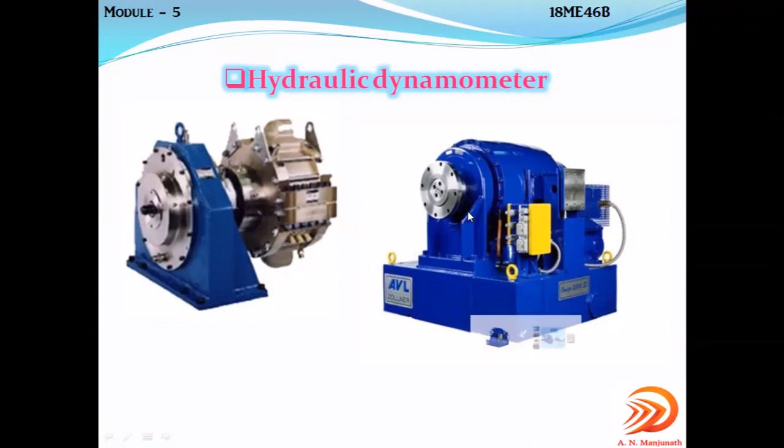Right. So these are some of the dynamometers which may be used in the industries. Hydraulic dynamometer. See, this is the image which is given in the book. Hydraulic dynamometer. You can observe the image. It consists of water here, right? Hydraulic.

So this will be the housing. This is the shaft, which is coupled to the device or the machine for which you are supposed to do the measurement of the torque or the power, right? That is the shaft which is to be connected. This shaft is placed on the trunnion bearings. You can observe here, right? This arrow mark indicates it is rotating.

Inside this housing, there will be radial blades. I will show the video so that you can get the idea of how the blades look and how the movement takes place. So there is an inlet water and an outlet water, as shown in the image. Water inlet, water outlet. So water will flow around these radial blades.

Right. So this is what the housing looks like. And this housing is connected with a reaction arm. This reaction arm is the one which will measure the force, the torque produced by the machine or the engine to which this dynamometer is coupled. So, hydraulic dynamometer.

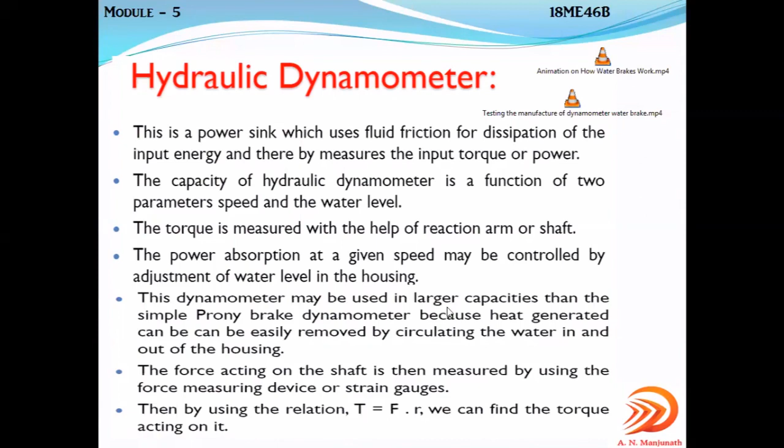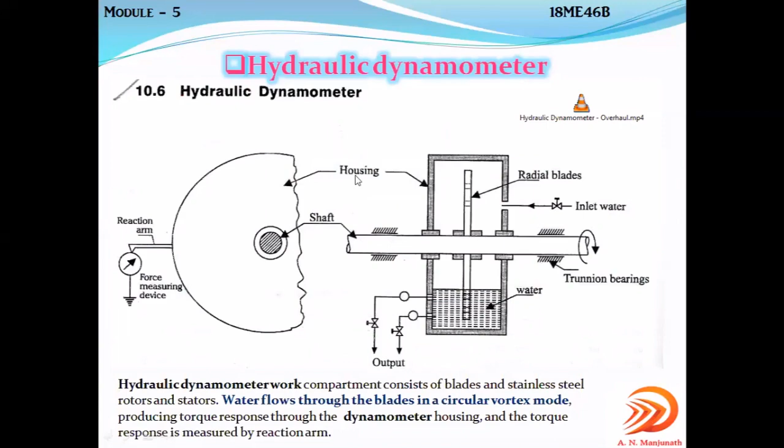So we'll just play a video about the parts so that you can have a little better idea about what a hydraulic dynamometer actually is, and how the radial blades, the impellers inside this housing, will look.

So it is a power sink. It works basically on the principle of fluid friction. So these can be built for considerably larger capacity as compared to the Prony brake dynamometer, which is a mechanical dynamometer.

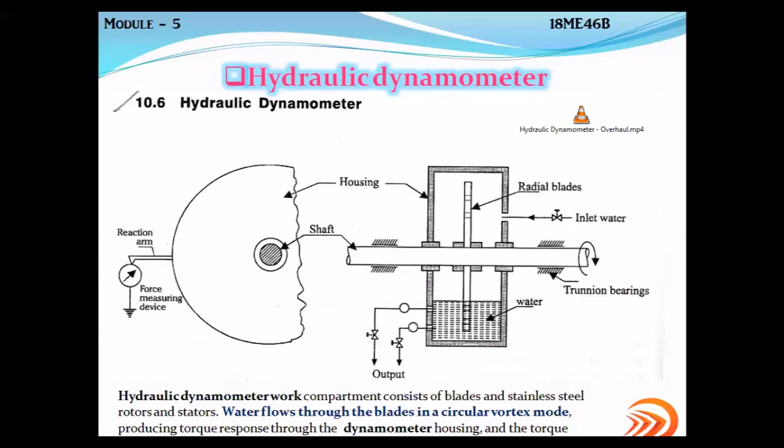This is a hydraulic dynamometer. So, some of the advantages of hydraulic dynamometers over mechanical brakes. Mechanical brake means the Prony brake, right? As compared to this, what advantages is the hydraulic dynamometer going to have over mechanical brakes? In the hydraulic dynamometer, a constant supply of water running through the braking medium acts as the coolant.

So as I told, these hydraulic dynamometers may be made in considerably larger capacities compared to the mechanical brake, the Prony brake dynamometer, because the heat it is going to...

Advantages of hydraulic dynamometers over mechanical brakes: these are flexible in controlling. These can be used to measure the brake power of very large and high speed engines. This uses the water itself as a coolant, as compared to the Prony brake. The Prony brake or mechanical dynamometer is a dry friction dynamometer, whereas this one is fluid friction.

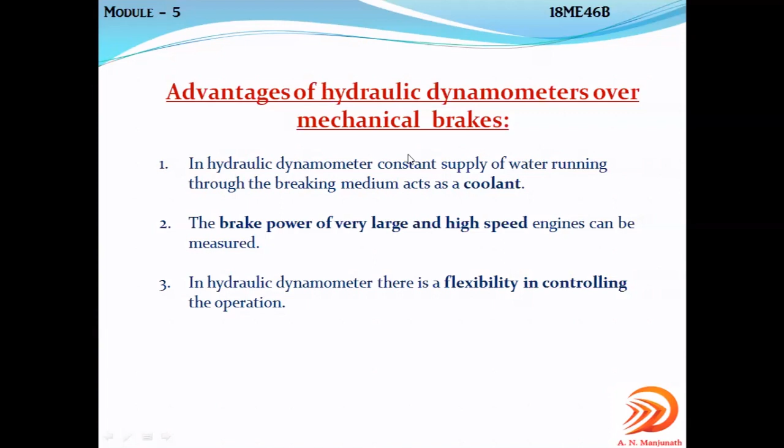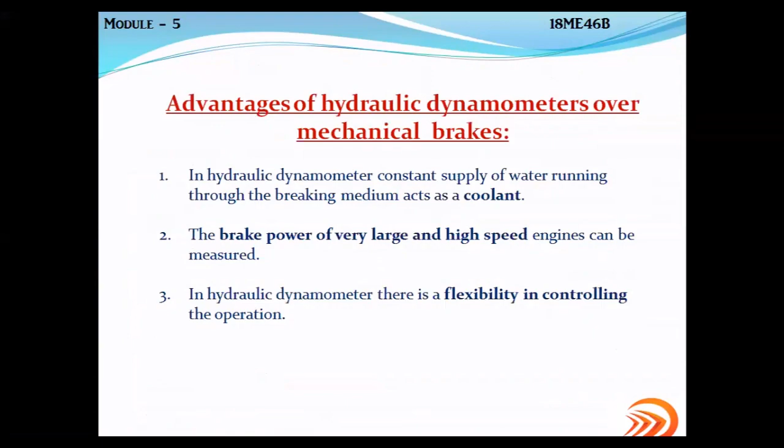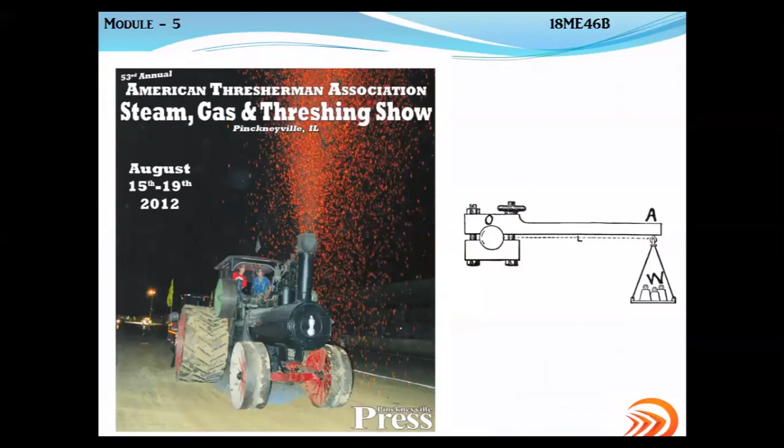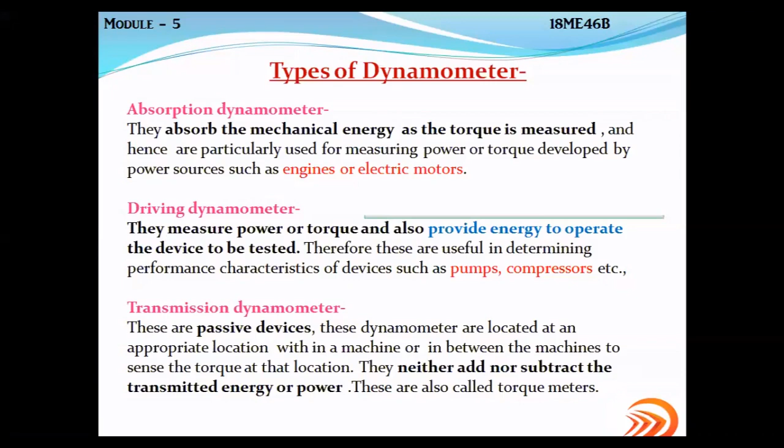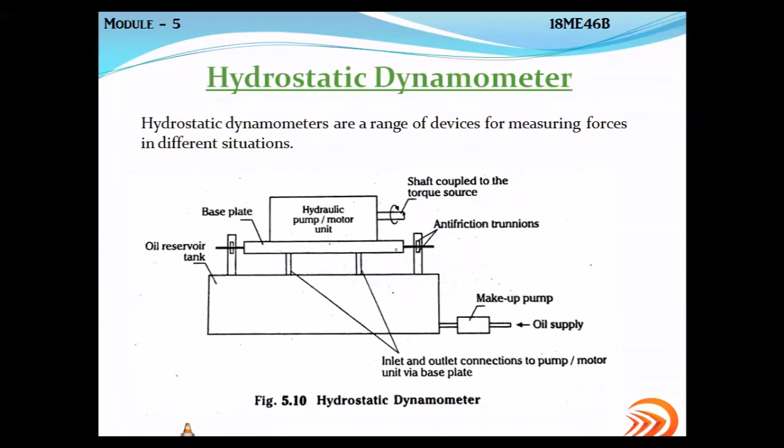So we'll come back to the electric dynamometer. See here, the same thing is given. Suppose the machine to be tested, the device for which we need to measure the torque or the power, is a power generator; then the dynamometer must be capable of absorbing it. That means they are going to use the absorption type electric dynamometer.

Suppose the machine to be tested is a power absorber; then the dynamometer must be capable of driving it. If the machine under test is itself a power absorber, like a pump or a motor which absorbs power, these dynamometers should be capable of driving it in order to measure the torque or the power. Right? That is electric dynamometer.

One of the types of electrical dynamometer is the eddy current dynamometer. You can observe this somewhat, it looks like this, right? The eddy current dynamometer. I think all of you know that one.

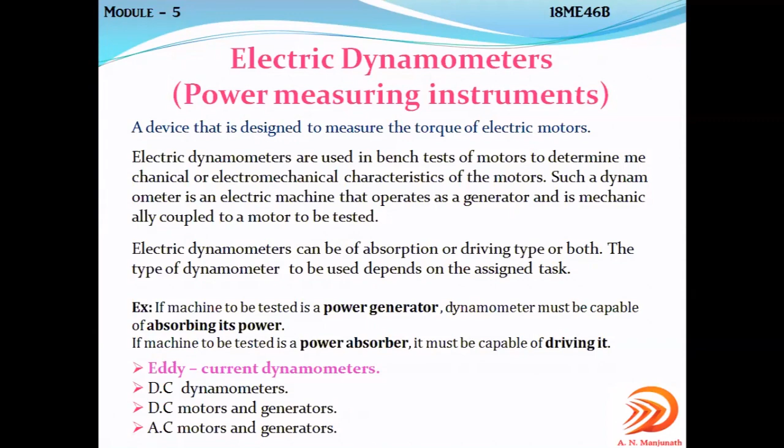It is basically used to measure power generators. That means the device which is going to generate the power, like the engine, motors, which will generate the power - for those, eddy current dynamometer will be used, strictly of absorption type. Absorption type means the device is power generator, that is the meaning.

You can observe here, it is used only for measuring the power from sources such as IC engine or electric motor, because it is an absorption type dynamometer. If it is absorption type dynamometer, the device which is going to measure the torque or power will be a power generator, and IC engine and electric motor are power generators.

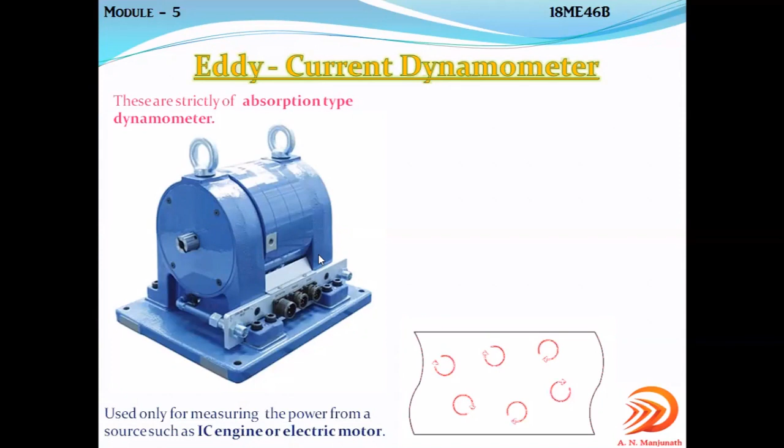So this is what the eddy current is going to generate. Before discussing about this dynamometer, we will discuss about the eddy current basics, then we will move on to the dynamometer working, right?

Eddy current, I told, will be in the form of circular path. Current which is going to generate in the conducting material in the form of circular path will be eddy current. How is this going to form? There is explained in this image.

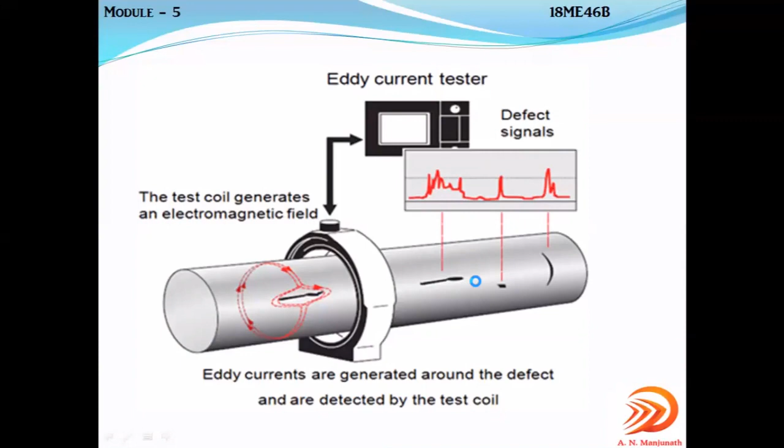See, when a conducting material moves through the magnetic flux field, a voltage will be generated, which causes the current to flow. That is what the eddy current means, as I discussed over here. Eddy current dynamometers work basically on the principle of this eddy current generation. So when the conducting material moves through the magnetic flux field, as it moves through this magnetic field, a voltage will be generated, which causes the current to flow. That current is what this eddy current is, right?

So if the conductor is in the form of a metal piece - a short bar of metal and not part of a complete circuit - voltage will still be induced in it.

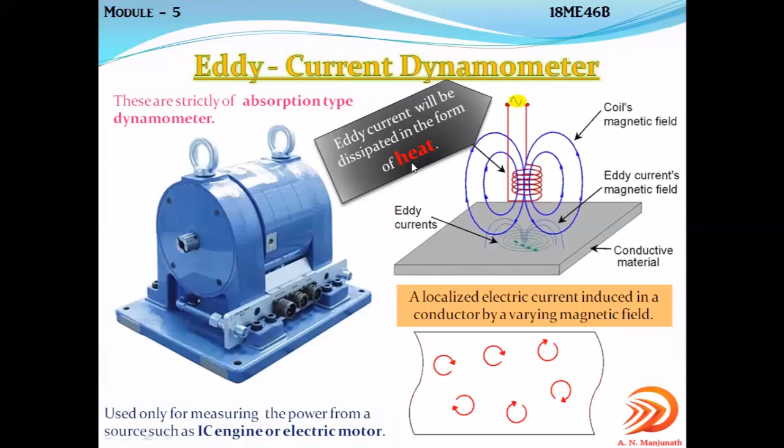So coming to this eddy current dynamometer, it consists of a non-magnetic solid rotor. You can observe here, it consists of a non-magnetic but metallic rotor, which is rotated in the magnetic field of the stator. This is the stator, what you can see here. Inside this stator, this rotor is going to rotate. This is non-magnetic, but it is a solid metallic rotor, which is rotated in the magnetic field of this stator. So the magnetic field is produced by passing DC current.

The magnetic field is generated by passing DC current - this stator will generate the magnetic field through the coils which are attached to the dynamometer housing. This housing will generate that magnetic field. The housing is mounted on the trunnion bearings.

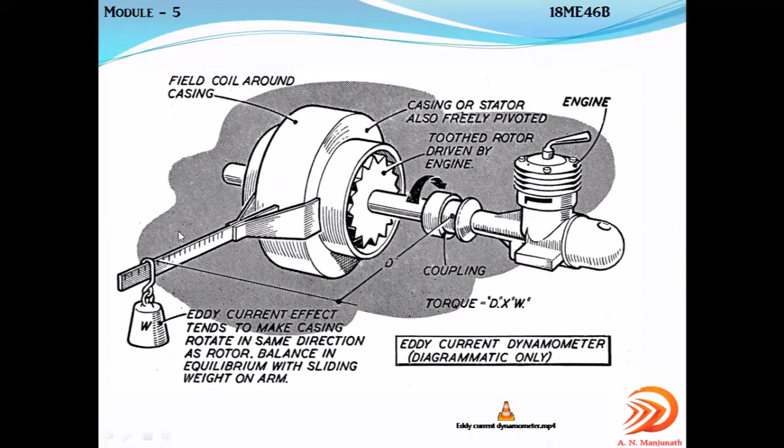So as the rotor rotates in the magnetic field, eddy currents are generated, and this magnetic field will tend to rotate the complete dynamometer housing in the trunnion bearings. The torque is measured with a torque arm extending from this housing - the torque is measured by this extension arm, which is called the torque arm.

And when the rotor moves in this field produced by the stator winding, an EMF is produced in it, resulting in a large loss of power due to eddy current, and that loss of power from the eddy current is dissipated in the form of heat in the gap between the rotor and the stator, and that heat will be removed by supplying cooling water.

So in practice, the speed, torque and power are computed by P equals 2 pi NT by 60. So the eddy current dynamometer works basically on the eddy current principle itself. So this is what the eddy current dynamometer is about, right?